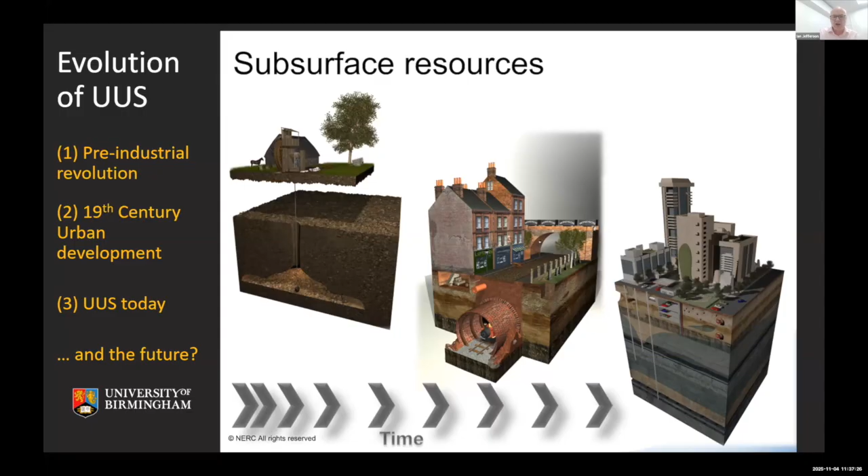So what does the future hold? And I think the future will enable some of these areas because it has great potential to meet the sustainable and climate change adaptation challenges that we face. And here's an example of probably where we are and where we're going.

The underground space in the urban environment, probably the top 50 meters or so, is what we're talking about. And you can see a variety of uses in that three-dimensional sketch there. And the one on the right shows you the complexity of the challenges. What we've got, though, is a number of aspects that are happening in our current climate change.

And often what we're seeing is a change in the water table in the ground, both with it decreasing and increasing in a number of areas, such as in Western Europe and the UK, and here in Birmingham, the groundwater table is rising. That presents a challenge to the assets we've got buried in the ground, and that needs to be managed. So an example would be in London, the underground system is now at a level where the water table has risen above and it's presenting problems of controlling that ingress into the transportation system.

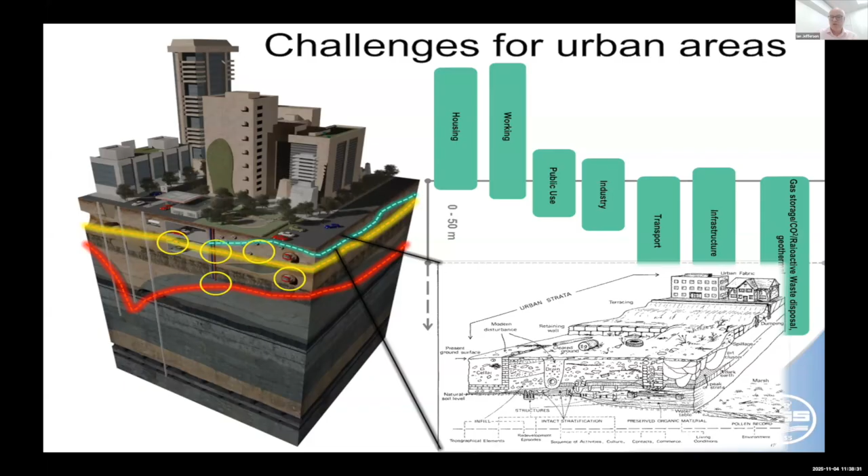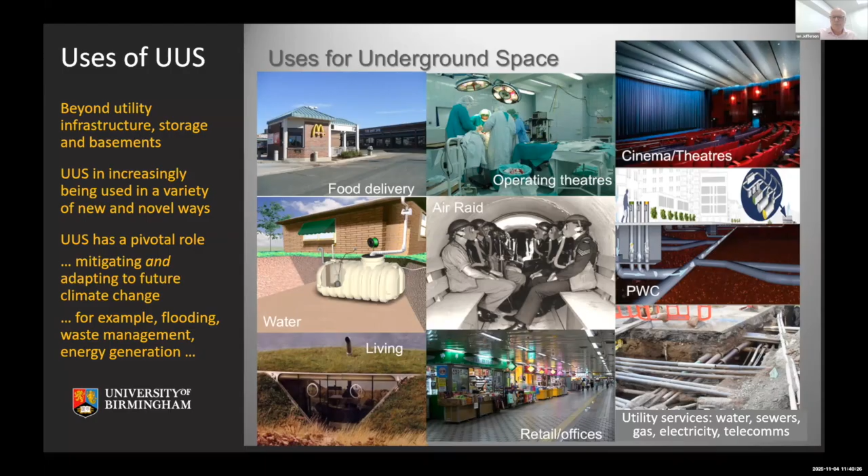The problem is we need to understand the ground, and the underground space is a hazard. And a key thing to how we're going to manage sustainable practices and mitigate for climate change and adapt to it is we've got to understand the hazards we're dealing with. So risks and hazards are very much at the foremost of what we're going to do if we go forward and understand the consequences of that.

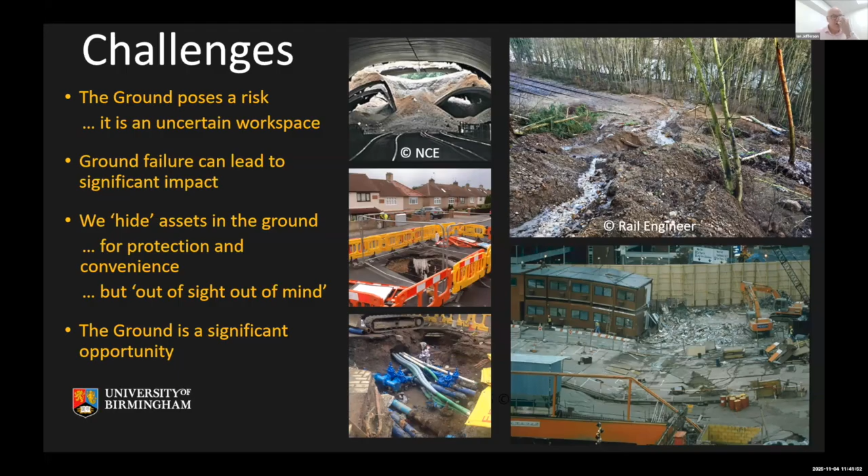And so if we don't manage these and understand these and engineer and plan for these risks, we're going to have a number of serious consequences, which both negate all the work we're doing and actually cause further problems. There is a problem we have, though, within many urban environments, that we tend to hide our assets in the ground, out of mind, until they fail. So again, it goes back to the same thing: we've got to understand what we're dealing with and manage it if we're going to achieve the requirements we need.

And so we need to move to an investment cycle that looks over the life cycle of the assets we're putting in, for future proofing, and we need to invest in that. And I think we've now got the case where, with climate change, with carbon, with other aspects that we need to take account of, the business case becomes a bigger piece, and that will be an enabler to make sure that this can happen. Up to this point, the cost of the initial investment has been an obstacle, and that's prevented some of the solutions that we know can work in this context.

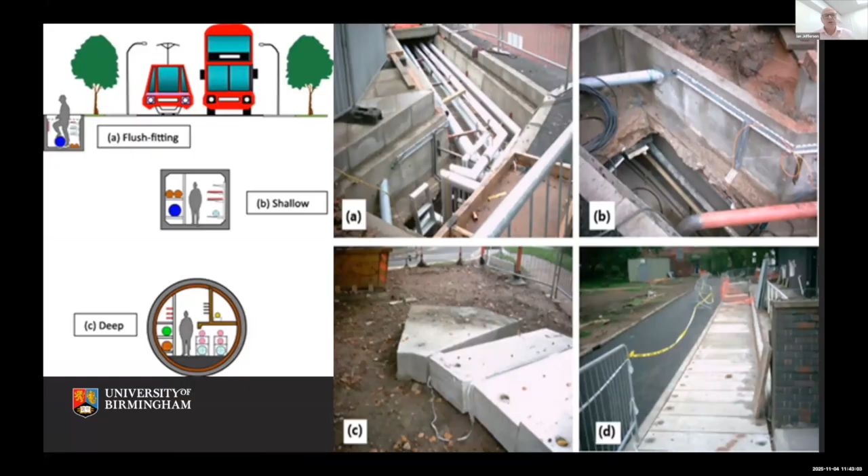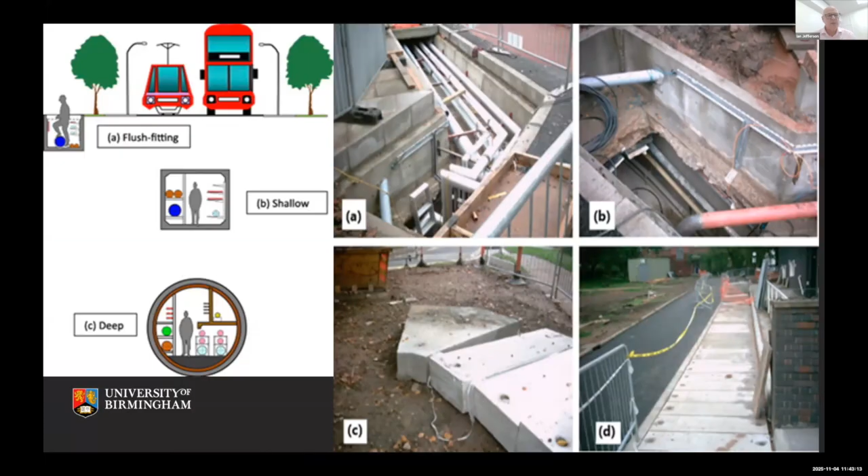This is an example of a solution. So what we've got on the left is a picture of a multi-utility tunnel where we actually bury these in modular units, which have a number of advantages, which I'll touch on later. But the key thing is we can access these utilities to maintain them, maintain the integrity, and adapt them should future needs require it. Now, there's a number of aspects there. This is for utilities. We could have other things in that space.

The 4 pictures on the right are taken from the University of Birmingham campus, where we actually have such a multi-utility tunnel across the campus. And this has been transformative in the way that we keep and maintain the utility supply for the campus. Here you can see the container, and you can see the units, the slabs that go on. This is in the road, down by the civil engineering laboratories. What this means is these slabs can be picked up quickly without having to dig up the road. We can go in and repair or maintain or add whatever we need to this utility. It's in a safe, clean environment for people to work in.

We put it back, and so we minimize not only the financial costs, but also the other add-on costs that we can get with these things, both from an environmental impact and a social impact. Because if we have to dig up the road and cause traffic delays, that has a series of implications, including the social one, which is often forgotten in the sustainability discussion.

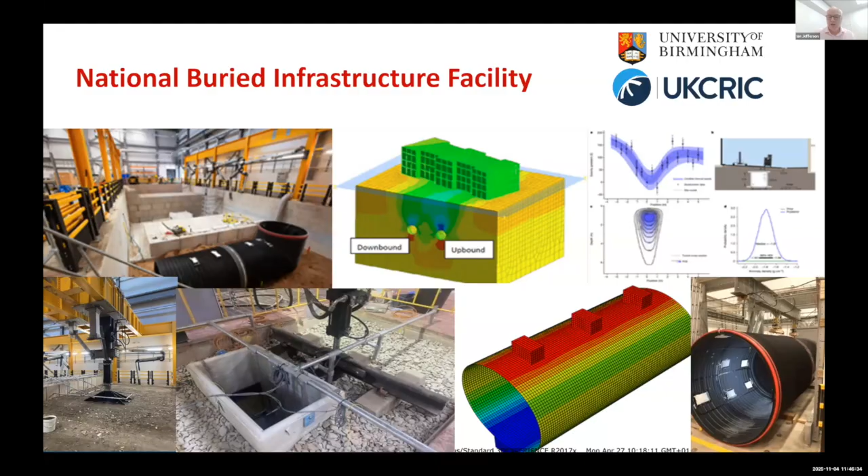The one here on the top right is just the next generation of quantum sensors that refines the way we visualize the ground, giving us the information to make sure that we're actually in a better place to undertake the work that's needed to achieve these goals.

A number of aspects here. There's a lot of work being done on visualization - the use of numerical tools, digital tools, but also the use of modeling and increasingly AI as a predictive tool to build up a picture of the characteristics of the ground in urban environments, both from three-dimensional modeling, but also increasingly four-dimensional, allowing that time dependency impact to take place.

Because what we're building, if we want to make it fulfill the circular economy and other longer-term aspirations, we need to know how it's going to perform over the life cycle of its use, and this could be anywhere up to 120 years. Then build in how we can recycle it to ensure we get that circularity built in.

We need to know what we're dealing with. Clearly natural deposits, from an engineering point of view, we have some understanding. The anthropogenic or human-made materials are obviously much more complex and a real challenge. Often they're found in urban environments, and often that has a number of other consequences from construction soil and other areas, which affects the urban soil health. That opens up, if we can improve that, a whole raft of things in terms of greening urban environments, but obviously a potential for urban farming and other aspects that help solve other sustainable challenges.

So hence, taking this holistic, sustainable view to address some of the key challenges that bring everybody together under the banner of people, planet, and policy.

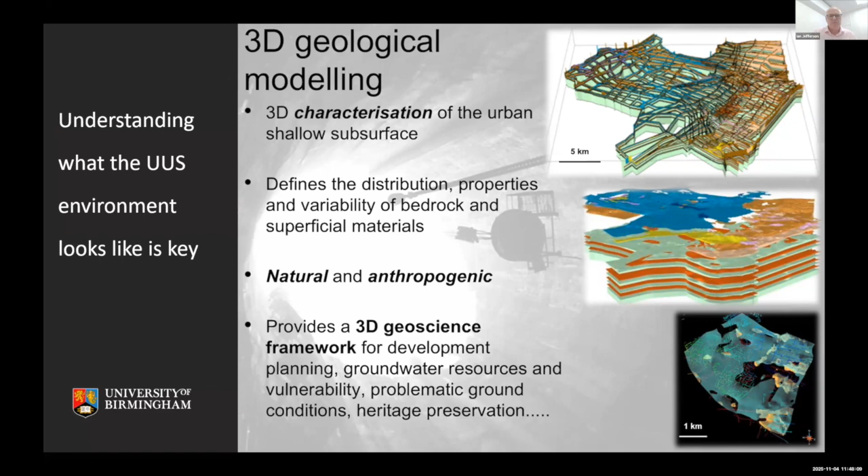There are a number of opportunities there, and they're listed there.

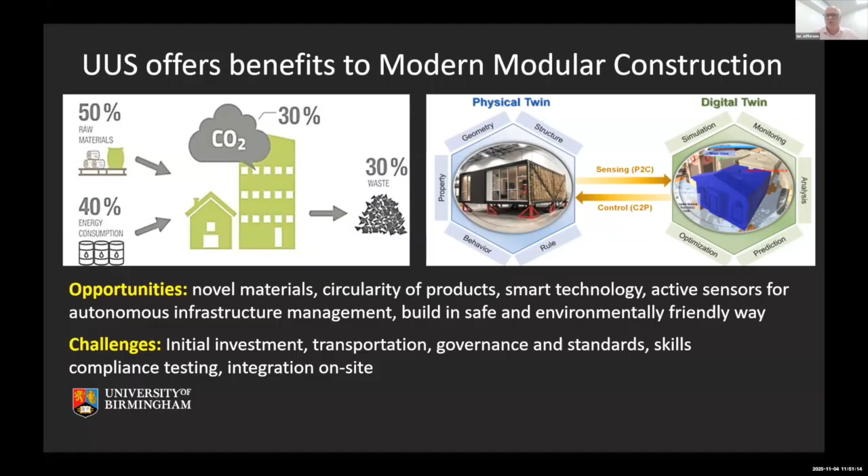There are a whole raft of things that come in there. The opportunities of how we use the underground space are really huge, and it's something we need to embrace if we're actually going to make our urban environments more sustainable in the future.

To ensure that what we're producing within the sector I work in, in this case construction, is fit for purpose both within the short term and long term. And that's where different disciplines need to come in and work together.

So I've done a lot more work in recent times where we actually bring that systems collaborative approach to bear on the challenges that we face, to set out in a number of areas.

I think we can do that, and I think I'm seeing around the world in many countries a drive to do this, driven by governments and other organisations. I think we have got the solutions, and we're starting to see the benefit of this. So I think we're starting to turn the corner.

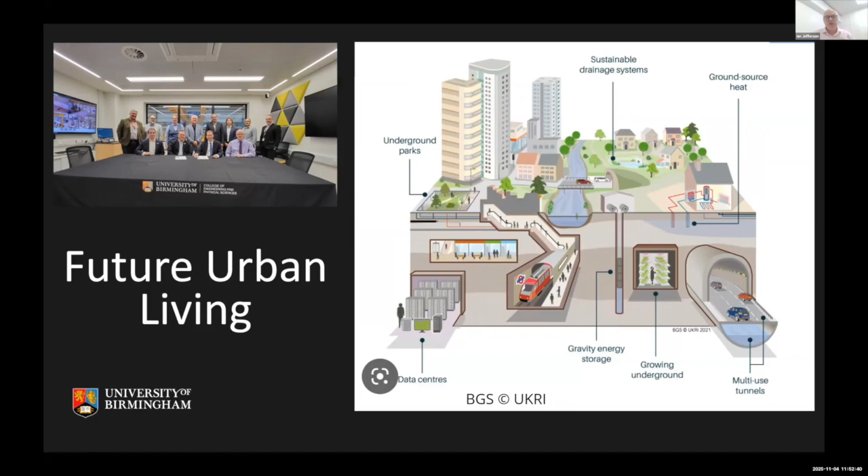That was just a brief go through of some of the challenges and I think some of the opportunities that urban underground space provides us. There's a whole raft of things in there, but I'm happy to take questions on it. Thank you very much.